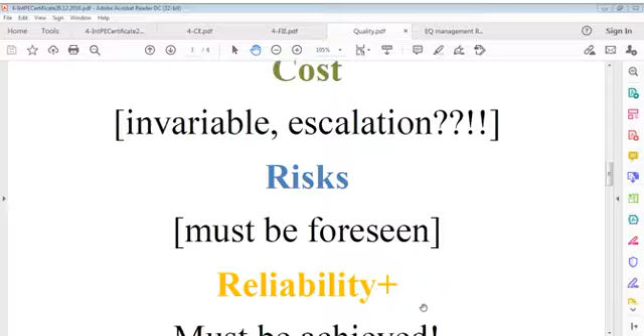I'm not saying only I am doing this, maybe I am wrong. There may be people working, but I have not seen such input on social forums, social websites, internet, or somewhere else. I don't know, maybe I am wrong. I'll be happy if I am proved wrong. I have written many times also on this issue, but I think people don't even like to read that.

I put my URL sometimes on my postings on social media, but I am not sure what happens.

Our profession, our jobs shall work only if people are alive, if the country is healthy. If the country is not healthy, people keep on dying, keep on suffering because of COVID-19 or such virus. What shall we do? I have no answer. Today the situation is very grim, very serious. Around 2 crore people are already infected officially, but I don't agree with that. Around 200,000 people have lost their lives, but it's more than that. I don't agree with government figures, but because these are official, we have to refer to them.

Reports are coming in from various reliable sources that the speed of COVID-19 spread is going to heavily increase in coming times. Some say in May it will be 500,000 infections per day. Some say it is up to 800,000 per day. It's a very grim figure. It is, yes.

Now it is about 20% positivity of cases of those tested every day. If we take that 20%, and we have a total population of 130 crores, 20% of that can be 26 crores, or 25 crores, or 250 millions. That point we should not forget, that we are standing in a very problematic state of COVID, and there is no solution so far.

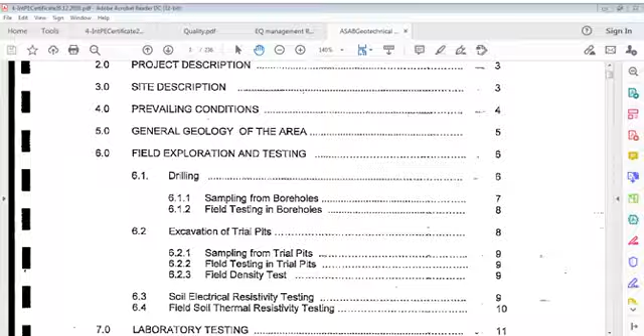And this has certain chapters, like what was the purpose of the study, what was the scope of work, project description, site description, prevailing conditions, general geology of the area, field exploration and testing. There is drilling, sampling from boreholes, field testing in boreholes, excavation of trial pits, sampling from trial pits, field testing in trial pits, field density test, soil electrical resistivity testing, and field soil thermal resistivity testing.

And then laboratory testing, that is laboratory tests and codes, then surface and subsurface conditions, ground materials physical, mechanical and thermal properties, materials chemical properties, sulfate content, chloride content, other chemical contents, oil and grease and hydrocarbons, pH value, and there could be groundwater in cavities.

General discussions for choice of suitable foundations, footings on sand, general consideration of settlement, consideration of bearing capacity, choice of types of foundations, then conclusion, which is foundation depth and type, tank foundations and hydrostatic testing, the available bearing pressure, foundation settlement, soil design parameters, foundation subject to vibrations, general consideration in designing dynamic bases, subgrade evaluation and pavement

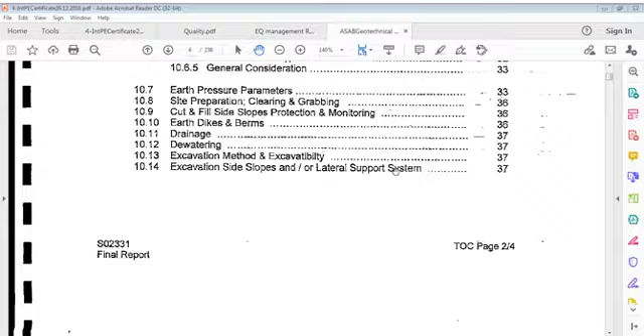consideration, objectives, method of analysis, subgrade properties, recommended type of pavement, general considerations, earth pressure parameters, site preparation, clearing and grubbing, cut and fill, side slopes, protection and monitoring, earth dikes and berms, drainage, dewatering, excavation methods, excavatability, excavation side slopes and lateral support system, and also backfill material and compaction criteria, structural fill and general fill. There are many other fills as well, but these two are important.

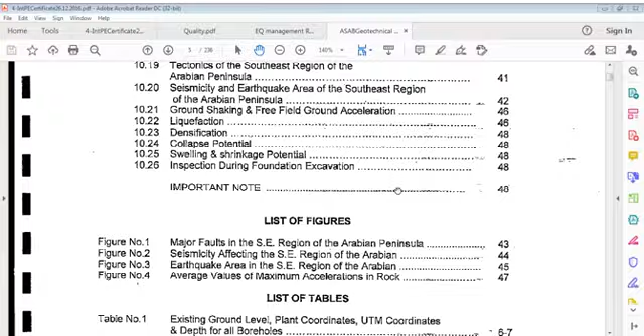And borrow sources, soil resistivity and corrosivity, foundation concrete, tectonics of southeast region of the Arabian Peninsula, seismicity and earthquake area of southeast region of Arabian Peninsula, ground shaking and free field ground acceleration, liquefaction, densification, collapse potential, swelling and shrinkage potential, inspection during foundation excavation.

And then there are certain figures, major faults in southeast region of Arabian Peninsula, seismicity affecting southeast region, earthquake area in southeast region, average values of maximum acceleration in rocks. Then there are certain tables which give existing ground levels, plant coordinates, UTM coordinates and depth for all boreholes and trial pits. Proposed foundation level, foundation type and allowable bearing pressure, representative compression wave and shear wave velocities, summary of CBR and modified Proctor, earth pressure and soil parameters, soil corrosivity versus resistivity.

And here is the appendix. Location of boreholes and trial pits, means where these are located, coordinates, and also logs of boring and trial pits, legend to logs, logs of boring, logs of trial pits, generalized subsurface profiles, and field test results, field density test results,

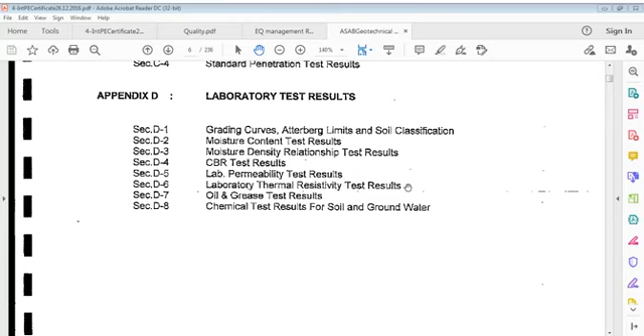soil electrical resistivity test results, soil thermal resistivity test results, standard penetration test results, laboratory test results, grading curves, Atterberg limits and soil classification, moisture content test results, moisture density relationship test results, CBR test results, laboratory permeability test results, laboratory thermal resistivity test results, oil and grease test results, chemical test results for soil and groundwater. This is the index of that.

You can see a huge coverage has been included in this soil report. You may not find all that in your soil engineering books. This is practical, a kind of thorough extraction of knowledge in this report. It's very important to read such reports for enhancing your knowledge, how work is done in field. This is much above what you study in your university, because university won't give you this much chance or opportunity to know something.

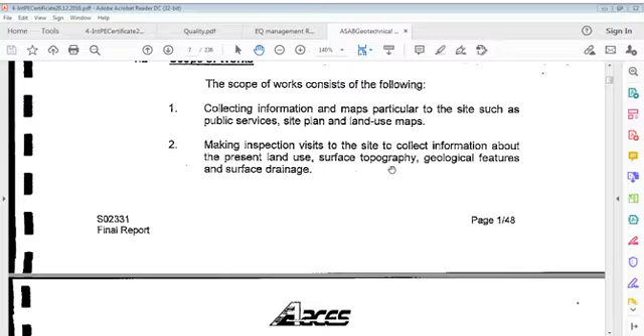Now, for example, it says in the scope of work here, why this report was prepared, what was the reason. The scope of works consists of the following: collecting information and maps particular to the site, such as public services, site plan, and land use maps. Making inspection visits to the site to collect information about present land use, surface topography, geological features, and surface drainage.

Drilling a total of 28 boreholes, or it is 28 in this case, there can be whatever number, and boreholes you know very well, in situ testing and sampling of disturbed and undisturbed samples. Excavation of 3 trial pits, can be whatever number depending on areas. Carrying out 14 field density tests, it can be whatever number of field density tests.

Carrying out 18 electrical resistivity tests with 0.75, 1.5 meter, 2.25 meter, 3 meter and 4.5 meter spacings, various spacing based electrical resistivity tests. Carrying out 6 field thermal resistivity tests.

Carrying out physical, mechanical, thermal and chemical laboratory testing as follows, which is very important. It's giving physical, mechanical, thermal and chemical laboratory testing. It's very important. Its range of tests, you can say soil samples, range of tests. This is particle size analysis.

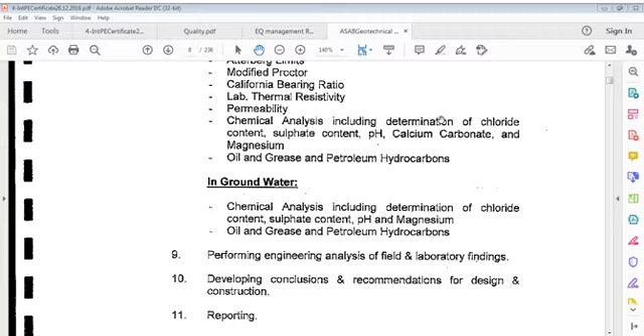Particle size analysis, materials passing number 200, moisture content, Atterberg limits, which you know, liquid limit, plastic index, all that. Modified Proctor density, California bearing ratio CBR, that is used for roads. Lab thermal resistivity, permeability, chemical analysis including determination of chloride content, sulfate content, pH, calcium carbonate, and magnesium. Oil and grease and petroleum hydrocarbons.

These are tests related to laboratory, and you may call them generally full range, though it's not complete full range. Yes, these are very important tests because particle size is very important. We have to do so much testing on that to know what size or fineness is, all that. Moisture content, Atterberg limits. All you have studied, that is just a kind of information that has been accumulated in one place.

Oil and grease and petroleum hydrocarbons, and in groundwater, chemical analysis including determination of chloride content, sulfate content, pH and magnesium, oil and grease and petroleum hydrocarbons, performing engineering analysis of field and laboratory findings, developing conclusions and recommendations for design and construction, and reporting.

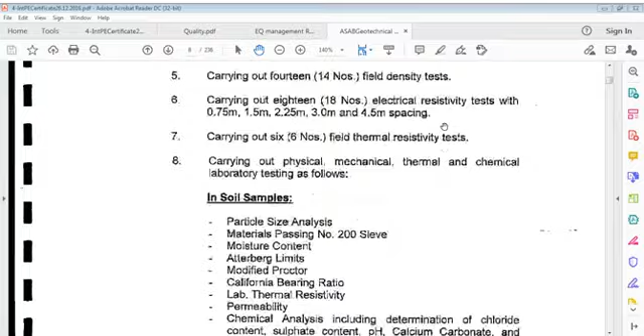So these 11 points are written here, which constitute the scope of this report. It's a specific one in this case, but there can be whatever size of scope, there's no limit. Because this was a big project, the scope is extensive. And the project has a description of sites. Just for your information, I read it for you. It has nothing to do with the report. It just tells you what this project is.

This project was planned at whatever site in 2000. The existing plant comprises certain identical trains, total 826 MSCs, having gas separation and condensate stabilization. The new processing facility shall include gas treating, molecular sieve dehydration, NGL recovery, acid gas compression.

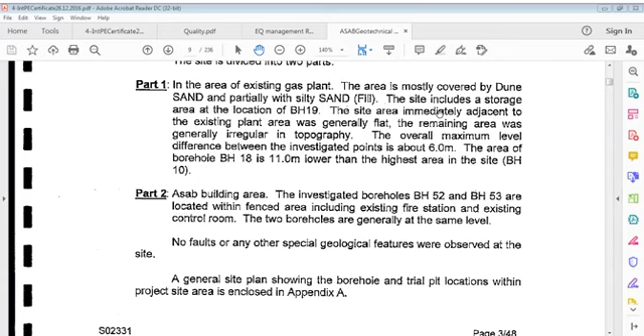Now the site is located in a remote area, and we are not worried about this, we are worried about the report. Still I read the weather conditions, maybe you are interested in writing some report about soil investigation, or you may see some report. Prevailing conditions must be shown somewhere, and the site is situated in Abu Dhabi where a hot arid climate prevails.

A hot arid climate is one where evaporation exceeds precipitation, such as rain and dewfall. This climate regime produces characteristic hot desert terrains. Average annual rainfall may only be a few centimeters, even only a few millimeters in some parts, which usually occurs seasonally and sometimes only from a single cloudburst.

Summer shade temperatures are frequently in excess of 40 degrees Celsius, and humidities may be around 100% near the coast. Contrast between maximum night and day temperatures, and between night and day humidities, is often great. Strong persistent winds are normal in many areas.

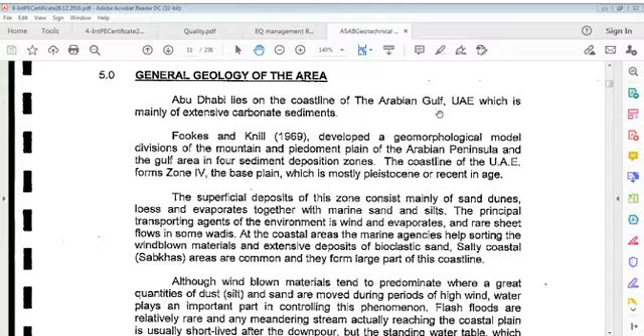Now, this geomorphological model division of mountain and piedmont plain of the Arabian Peninsula and Gulf area in four sediment deposition zones: the coastline of this country, that is zone 4, base plain, which is mostly Pleistocene or recent in age. Superficial deposits of this zone consist mainly of sand dunes, loess and evaporites together with marine sand and silts.

Principal transporting agents of the environment are wind and evaporites and rare sheet flow in some valleys. At coastal areas, marine agencies help sorting windblown materials and extensive deposits of bioclastic sand. Salty coastal areas, which we call in their language sabkhas, are common and they form a large part of this coastline.

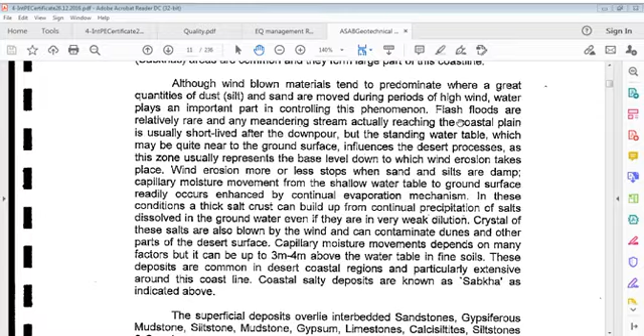Although wind-blown materials tend to predominate, where great quantities of dust, silt and sand are moved during periods of high wind, water plays an important part in controlling this phenomenon. Flash floods are relatively rare, and whatever meandering stream actually reaching the coastal plain is usually short-lived after a downpour. But the standing water table, which may be quite near to the ground surface, influences desert processes, as this zone usually represents the base level down to which wind erosion takes place.

Wind erosion more or less stops when sand and silts are damp. Capillary moisture movement from the shallow water table to the ground surface readily occurs, enhanced by continual evaporation. In these conditions, a thick salt crust can build up from continual precipitation of salts dissolved in groundwater, even if they are in very weak dilution. Crystals of these salts are also blown by wind and can contaminate dunes and other parts of the desert surface. Capillary moisture movement depends on many factors, but it can be up to 3 to 4 meters above the water table in fine soils.

These deposits are common in desert coastal regions and particularly extensive around this coastline. Coastal salty deposits are known as sabkhas, as indicated above. Superficial deposits overlie interbedded sandstones, gypsiferous mudstone, siltstone, mudstone, gypsum, limestones, calcisiltites, siltstones and conglomerates. Now, that was just a reference of what is below ground.

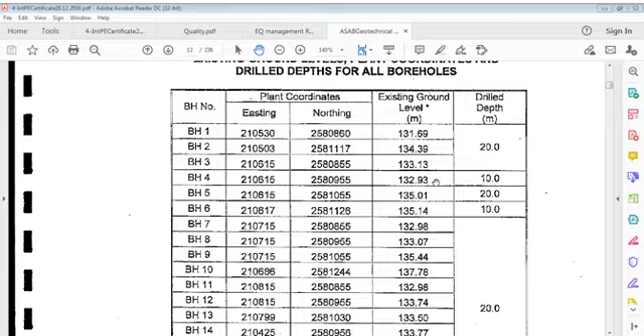Now, the drilling survey execution, investigation execution: in 2002, 28 boreholes were drilled at the project site. Boreholes are numbered BH1 through BH26, then BH52 and BH53. Existing ground levels, plan coordinates and drill depths at all boreholes are presented in this table. You can see this table has borehole number, plant coordinates, that's easting and northing, existing ground level and drill depth, from BH1 onwards.

Levels are referred to like 131.69, and of course drill depth is given as 20 meters, 10 meters, 20 meters, 10 meters, whatever they did, and levels are related to the department datum, so it's just reference. Existing ground levels, plan coordinates, etc., same continues. Borehole locations were determined by the company, and rotary drilling was executed.

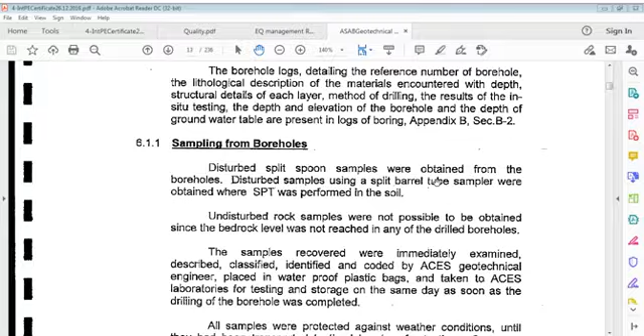Now, borehole logs detailing reference number of borehole, lithological description of materials encountered with depth, structural details of each layer, method of drilling, results of in situ testing, depth and elevation of borehole, and depth of groundwater table are presented in logs of boring. We'll see that one. Sampling from borehole. I'm just trying to say what they did in the beginning. I'm not going to read all. Just for information, we'll continue our engineering.

Disturbed split spoon samples, I'm talking of boreholes. Disturbed split spoon samples were obtained from boreholes. Disturbed samples using a split barrel tube sampler were obtained where SPT, standard penetration test, was performed in soil. Undisturbed rock samples were not possible to obtain since bedrock level was not reached in any of the drilled boreholes.

Samples recovered were immediately examined, described, classified, identified, and coded by the ACES geotechnical engineer, ACES being Arab Center Engineering, placed in waterproof plastic bags and taken to laboratories for testing and storage on the same day as soon as drilling of the borehole was completed. All samples were protected against weather conditions until they had been transported to the laboratory for testing. Care was taken during handling, packing, transporting and storing of samples to protect them against all moisture content alterations.

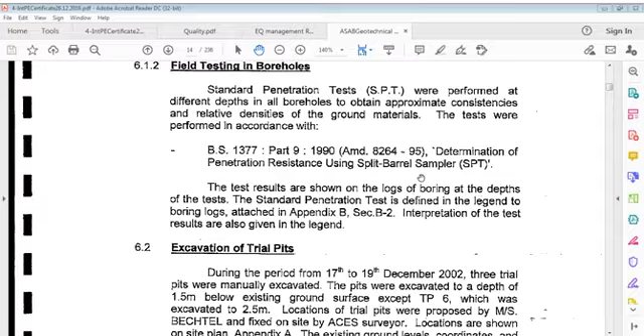Field testing in boreholes. Standard penetration tests, SPT we call it, were performed at different depths in all boreholes to obtain approximate consistencies and relative densities of ground materials. Tests were performed in accordance with BS 1377 Part 9 1990, Amendment 8264-95, determination of penetration resistance using split barrel sampler SPT. Test results are shown on logs of boring at depths of tests. The standard penetration test is defined in the legend to the boring logs attached in the appendix. Interpretation of test results is also given there.

Then trial pits. During the period, 3 trial pits were manually excavated. Pits were excavated to a depth of 1.5 meters below existing ground surface, except TP6, which was excavated to 2.5 meters. Locations of trial pits were proposed by the company. Locations are shown. Existing ground levels, coordinates and excavation depth for all trial pits are summarized. Now it's the trial pits table.

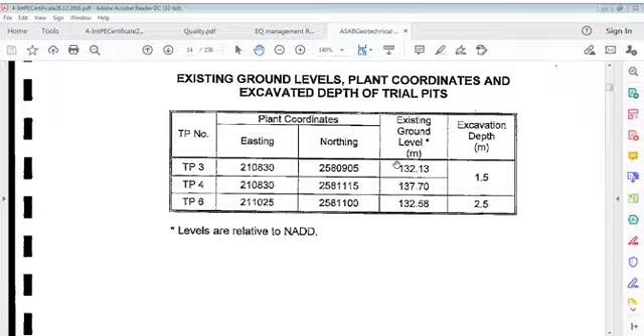Trial pits number, plant coordinates, easting, northing, existing ground level and excavation depth 1.5. 2.5. Sampling from trial pits. Representative bulk samples were obtained at every change of strata from each trial pit throughout excavated depths. These samples were placed in waterproof plastic bags, labeled and taken to laboratories for further examination and testing.

The following tests were performed on selected samples: natural moisture content, grain size analysis. What is natural moisture content? It is an important one. Grain size analysis, percentage fines passing sieve number 200, Atterberg limits, moisture density relationship modified, California bearing ratio CBR, thermal resistivity and chemical tests.

All laboratory test results are presented. Trial pit logs including plasticity index, in situ density, modified Proctor and CBR test results are presented. Field testing in trial pits. All sides and bottom of each pit were thoroughly examined and described by a geotechnical engineer according to ASTM 2488. Soil classification was adjusted according to ASTM 2487 after completion of laboratory testing.

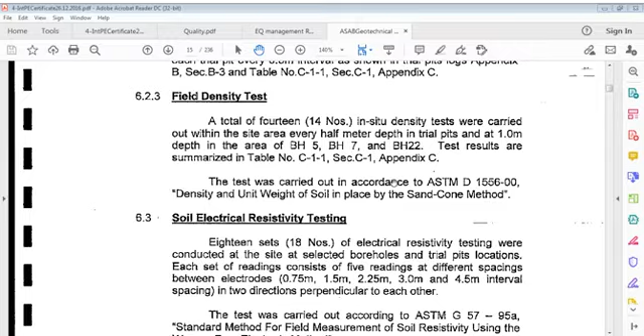In situ density test was performed in each trial pit every 0.5 meters, half a meter interval, as shown in trial pit logs. Field density test. 14 in situ density tests were carried out within the site area every half meter depth in trial pits and at 1 meter depth in the area of BH5, BH7 and BH22. Test results are summarized. Test was carried out in accordance with ASTM 1556-00, density and unit weight of soil in place by sand cone method.

Soil electrical resistivity testing. 18 sets of electrical resistivity testing were conducted at site at selected borehole and trial pit locations. Each set of readings consists of 5 observations. Each set of observations consists of 5 readings at different spacings between electrodes.

These are number 1, 0.75 meter, number 2, 1.5 meter, number 3, 2.25 meters, number 4, 3 meters and then 4.5 meters. Interval spacing in 2 directions perpendicular to each other. Test was carried out according to ASTM G57-95a standard method for field measurement of soil resistivity using Wenner 4 electrode method. Portable Megger DET5/4D digital earth tester was used. That is portable Megger. Test results are presented.

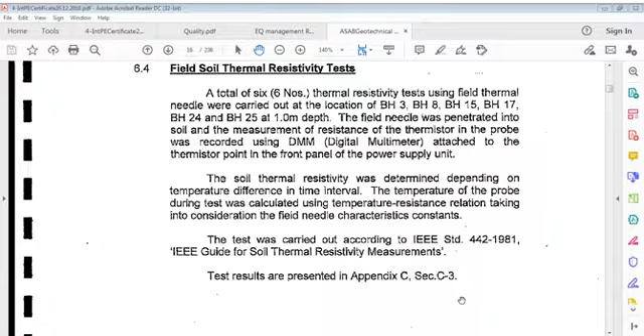Okay, now field soil thermal resistivity test. 6 thermal resistivity tests using field thermal needle, an important one, were carried out at locations of these boreholes at 1 meter depth. Field needle was penetrated into soil, and measurement of resistance of thermistor in probe was recorded using DMM, that is digital multimeter, attached to thermistor point in front panel of power supply unit.

Soil thermal resistivity was determined depending on temperature difference in time interval. Temperature of probe during test was calculated using temperature resistance relation, taking into consideration field needle characteristics constants. Test was carried out according to IEEE Standard 442-1981, Guide for Soil Thermal Resistivity Measurements.

Now, laboratory testing is very important on samples collected. In order to determine physical, mechanical, thermal and chemical properties of ground materials, laboratory tests were performed on selected samples from boreholes, trial pits and from existing surface. Laboratory test results are presented.

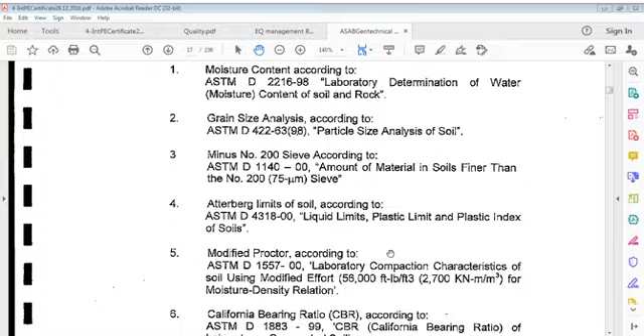Laboratory tests were moisture content, ASTM D2216-98, laboratory determination of water moisture content of soil and rock; grain size analysis according to ASTM D422-63(98), particle size analysis of soil; minus number 200 sieve according to ASTM D1140, amount of materials in soil finer than number 200, 75 micrometer sieve. Atterberg limits of soil according to ASTM D4318: liquid limit, plastic limit and plasticity index of soils.

Modified Proctor according to ASTM D1557, laboratory compaction characteristics of soil using modified effort, 2700 kilonewton meter per meter cube, for moisture density relation. Yes, the modified Proctor is according to this. California bearing ratio CBR according to ASTM D1883-99, CBR of laboratory compacted soil.

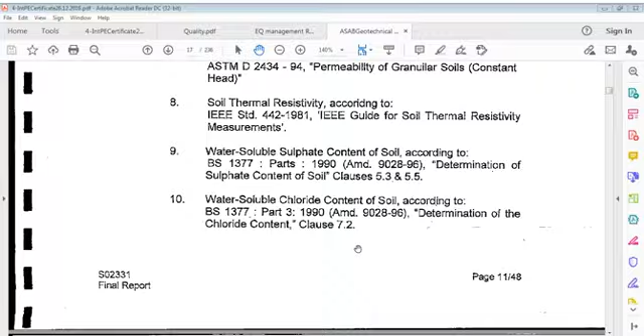Laboratory permeability according to ASTM D2434-94, permeability of granular soils, constant head. Soil thermal resistivity according to IEEE Standard 442-1981, IEEE guide for soil thermal resistivity measurements. Water soluble sulfate content of soil according to BS 1377 Part 3 1990, Amendment 9028, 1996, determination of sulfate content of soil,

clause 5.3. Water soluble chloride content of soil according to BS 1377 Part 3, 1990, Amendment 9028, 1996, determination of chloride content, Clause 7.2. Calcium carbonate content of soil according to BS 1377, Part 3, 1990, Amendment 9028, 1996, determination of carbonate content, Clause 6.3. Magnesium of soil according to ASTM D511, 1998, calcium and magnesium of soil.

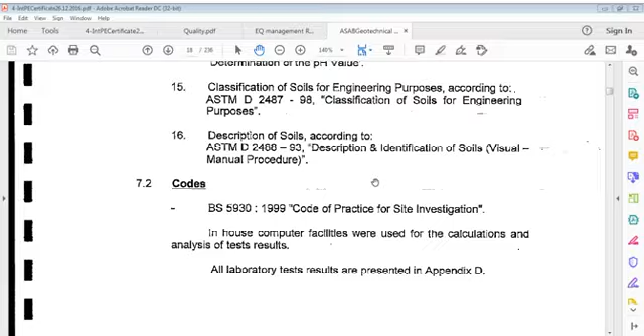Oil and grease and petroleum hydrocarbons in soil according to APHA 20th edition. pH value according to BS 1377 Part 3, 1990, amendment as above, test 9, determination of pH value. Classification of soils for engineering purposes according to ASTM D2487-98. Description of soils according to ASTM D2488-93, description and identification of soils, visual-manual procedure. Codes: BS 5930 1999, code of practice for site investigation.

In-house computer facilities were used for calculations and analysis of test results. All laboratory test results are presented in Appendix D. Now, surface and subsurface conditions. These are observations from these tests. Boreholes show that there are general similarities and continuities of subsurface materials encountered. However, some local variations were observed within the whole site area.

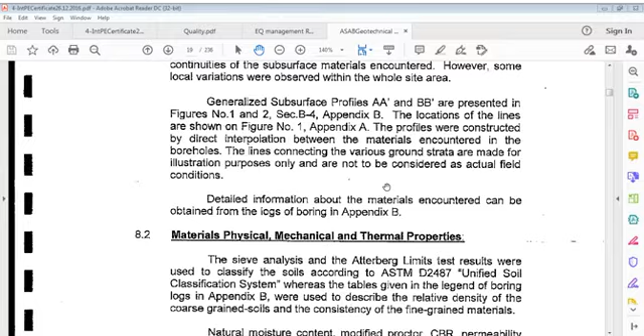Generalized subsurface profiles AA and BB are presented in figures 1 and 2. We'll see. Section B, Appendix B. Location of lines is shown on a different figure, in Appendix A. Profiles were constructed by direct interpolation between materials encountered in boreholes. Lines connecting various ground strata are made for illustration purposes only and not to be considered as actual field conditions. Detailed information about materials encountered can be obtained from logs of boring in Appendix B.

Materials, physical and mechanical properties. Sieve analysis and Atterberg limits test results were used to classify soils according to ASTM D2487 Unified Soil Classification System. Various tables given in the legend of boring logs in Appendix B were used to describe relative density of coarse-grained soils and consistency of fine-grained materials. Natural moisture content, modified Proctor, CBR, permeability and thermal resistivity were also carried out on selected samples from site. Further information about materials and their physical and mechanical properties can be obtained from the Appendix.

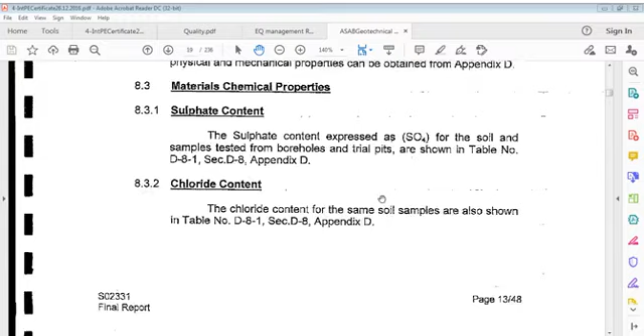Materials chemical properties, sulfate content. Sulfate content expressed as SO4 for soil samples tested from boreholes and trial pits is shown in table D8.1. Chloride content for the same soil samples is also shown in this table. Other chemical contents in soil like calcium carbonate content and magnesium were determined and tests are given. Oil and grease and hydrocarbons in soil for the same samples were determined. Test results are summarized and given.

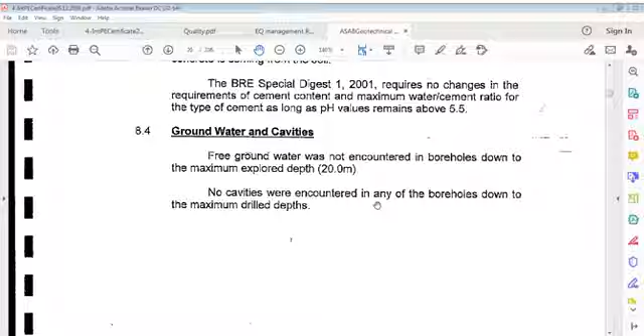pH value. Measured pH values for tested soil samples are above 7, which indicates that soil samples are slightly alkaline. Therefore, no acid attack on concrete from soil is possible. Concrete may be free from acid attacks. BRE Special Digest 1 2001 requires no changes in requirements of cement content and maximum water cement ratio for type of cement as long as pH value remains above 5.5. So there is no problem in requirement of cement content and maximum water cement ratio.

Groundwater and cavities. Free groundwater was not encountered in boreholes down to maximum explored depth of 20 meters. So this is water-free substrata. No cavities were encountered in any of the boreholes down to maximum drill depths. General discussion for choice of suitable foundation. This is also very important from an engineering viewpoint. We have to understand this because this is a practical recommendation by soil engineers.

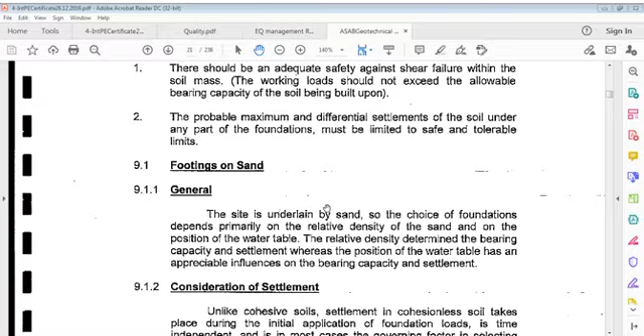Now, in designing foundations, the engineer must satisfy two independent stability requirements which must be met simultaneously. There should be an adequate safety against shear failure within the soil mass. Working load should not exceed allowable bearing capacity of soil being built upon. So this is safety against shear failure. Probable maximum and differential settlements of soil under whatever part of foundations must be limited to safe and tolerable limits.

So there are two points. One is for shear and the other for differential settlement. There should be an adequate safety against shear failure, working loads should not exceed allowable bearing capacity of soil, and probable maximum and differential settlements of soil under whatever part of foundations must be limited to safe and tolerable limits.

Now, footings on sand. The site is underlain by sand, so choice of foundation depends primarily on relative density of sand and position of water table. Relative density determines bearing capacity and settlement, whereas position of water table has an appreciable influence on bearing capacity and settlement. Consideration now, what we do for settlement.

Unlike cohesive soils—cohesive meaning clay soil—settlement in cohesionless, or non-cohesive, soils takes place during initial application of foundation loads. It is time independent.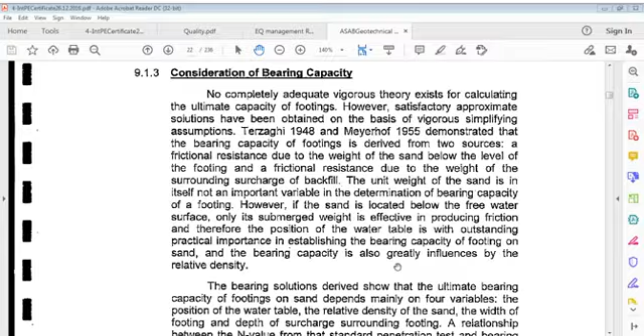Bearing capacity: no completely adequate rigorous theory exists for calculating ultimate capacity of footings. However, satisfactory approximate solutions have been obtained on the basis of rigorous simplifying assumptions. Terzaghi in 1948 and Meyerhof in 1955 demonstrated that bearing capacity of footings is derived from two sources: frictional resistance due to the weight of sand below the level of footing, and frictional resistance due to the weight of the surrounding surcharge or backfill.

Unit weight of sand is in itself not an important variable in determining bearing capacity of a footing. However, if sand is located below the free water surface, only its submerged weight is effective in producing friction, and therefore the position of the water table is of outstanding practical importance in establishing bearing capacity of a footing on sand. Bearing capacity is also greatly influenced by relative density.

Bearing solutions derived show that ultimate bearing capacity of footings on sand depends mainly on four variables: position of the water table, relative density of sand, width of footing, and depth of surcharge surrounding the footing. A relationship between the N value from the Standard Penetration Test and bearing capacity was established; however, this relationship is approximate.

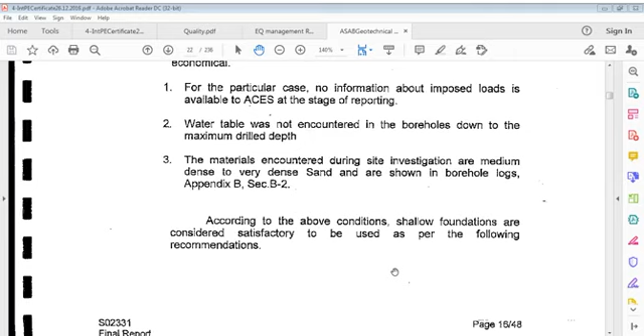For this particular case, no information about imposed load is available, so leave it. Water table was not encountered, so leave it. Materials encountered during site investigation are medium dense to very dense sand, and these are shown in the borehole logs. According to this condition, shallow foundations are considered satisfactory to use, following the recommendations.

What are these recommendations? According to field and laboratory investigations, subsurface conditions, engineering analysis, and practical experience, it can be concluded that the proposed structures and facilities can be satisfactorily supported by the ground at the site, provided that the following recommendations are taken into consideration: foundation depth and type.

Shallow foundations—you can say isolated footings connected with tie beams, and/or strip footings or raft foundations—can be laid at different depths. Materials encountered at those depths are medium dense to very dense sand with silt materials, either sand or sand with silt, which is considered suitable to provide adequate support for the proposed structures and facilities.

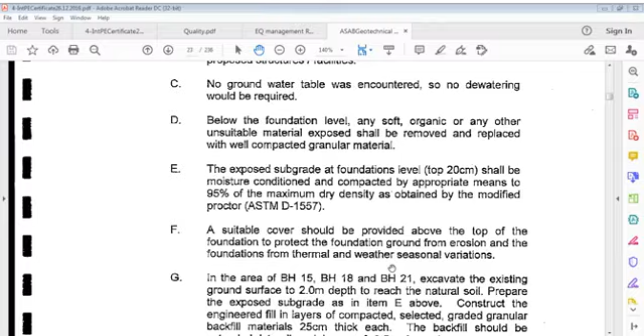No groundwater table was encountered, so no dewatering would be required. Below foundation level, whatever soft, organic, or otherwise unsuitable material is exposed shall be removed and replaced with well compacted granular material. So there is a direct indication in certain cases for soil improvement.

The exposed subgrade at foundation level—top 20 cm—shall be moisture conditioned and compacted by appropriate means to 95% maximum dry density as obtained by modified Proctor, ASTM D1557. A suitable cover should be provided above the top of the foundation to protect the foundation ground from erosion and the foundations from thermal and weather seasonal variations.

Now, in areas of boreholes 15, 18, and 21, excavate the existing ground surface to 2 meters depth to reach natural soil. Prepare the exposed subgrade as in the item above. Construct engineered fill—this is important.

Construct engineered fill in layers of compacted, selected, graded granular backfill materials, 25 cm thick each. Backfill should be extended laterally a minimum of 0.5 meter from the edges of foundations. Backfill should be compacted to 95% of maximum dry density as obtained by modified Proctor. Engineered fill shall reach the foundation depth shown.

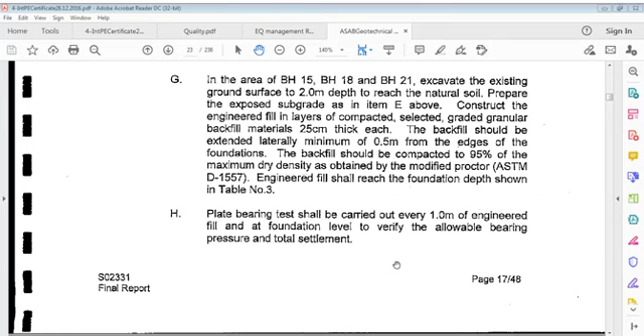So 95%, or even 98%, can be used. Now, plate bearing tests shall be carried out every 1 meter of engineered fill and at foundation level, to verify allowable bearing pressure and total settlement. Tank foundations and hydrostatic testing.

In general, a tank can be supported by either a reinforced concrete raft foundation or by a reinforced concrete ring beam.

Foundation depth may vary on natural subgrades, or the tank can be placed on selected and engineered fill materials at 0.5 meter higher than surrounding ground level. Final foundation depth shall be decided by the designer according to operational requirements.

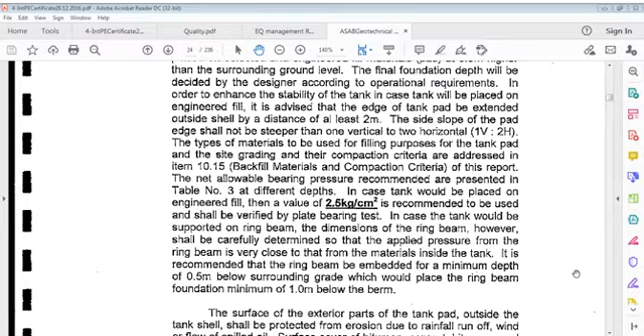Types of materials to be used for filling purposes for the tank pad and site grading, and their compaction criteria, are addressed in the item on backfill materials and compaction criteria.

Net allowable bearing pressure recommended is presented in table number 3. In case the tank would be placed on engineered fill, a value of 2.5 kg per centimeter square is recommended to be used and shall be verified by plate bearing test.

In case the tank would be supported on a ring beam, the dimensions of the ring beam shall be carefully determined so that the applied pressure from the ring beam is very close to that from materials inside the tank.

It is recommended that the ring beam be embedded for a minimum depth of 0.5 meter below surrounding grade, which would place the ring beam foundation a minimum of 1 meter below the berm.

Surface of exterior parts of the tank pad outside the tank shall be protected from erosion due to rainfall, runoff, wind, or flow of spilled oil. Surface cover of bitumen, cement, bitumen sand, or gatch, or locally available silty sand material, may be considered for this purpose.

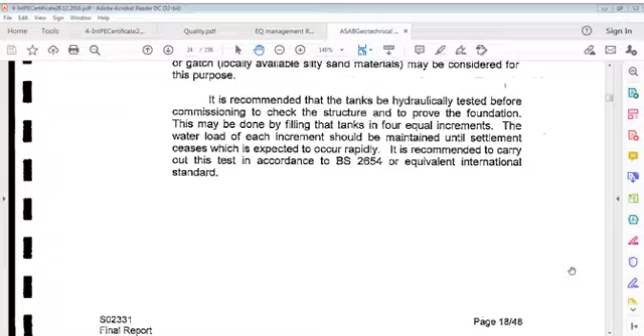It's recommended that tanks be hydraulically tested before commissioning to check the structure and prove the foundation. This may be done by filling the tank in 4 equal increments. Water load of each increment should be maintained until settlement ceases, which is expected to occur rapidly. It is recommended to carry out this test in accordance with BS 2654 or an equivalent international standard.

Allowable bearing pressure for shallow foundations was determined for the foundation ground as specified above, using practical experience and results obtained from field standard penetration tests and empirical equations developed by Terzaghi and Peck, as modified by Bowles, taking into consideration a safety factor of 3 against shear failure of soil.

Accordingly, net allowable bearing pressure values are recommended to be used for design of footings with different widths and at different depths, based on 25 mm settlement.

Foundation settlement was checked using recommended allowable bearing pressure values and values obtained from standard penetration tests, and found to be less than tolerable limits of 25 mm for isolated strip footings and less than 50 mm for raft foundations. Most of the settlement will take place during the construction period.

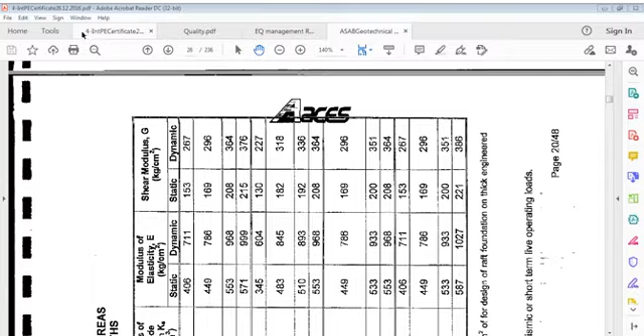We will take details later. My purpose was just to apprise everybody about how quality is maintained everywhere, and we have to think of, as I said about the soil report, I tried to refer you to this subject. It's really very important to understand this.

Soil report: the soil report requires a thorough review through the engineering section to be made sure that recommendations included by the soil or geotech engineer have been covered within the design report. In case of any pinpointed observation, it should be brought to the notice of the designer through agreed procedures.

Now, testing of all materials according to specification requirements must be conducted to ensure demanded quality adherence of materials. Particularly, reinforcing bars is an important item for the purpose of procurement, rightly.

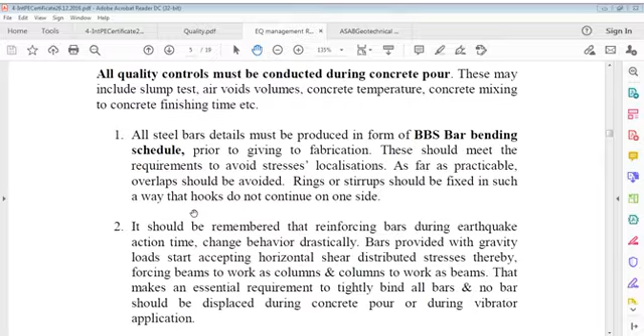All quality control must be conducted during the concrete pour. Whatever quality activities are required, the site engineer must make sure that whatever the drawings contain, whatever details are therein—ductile detailing of reinforcement—whatever details are missing should be read, understood, and pointed out. If you have some reservation, it must be discussed.

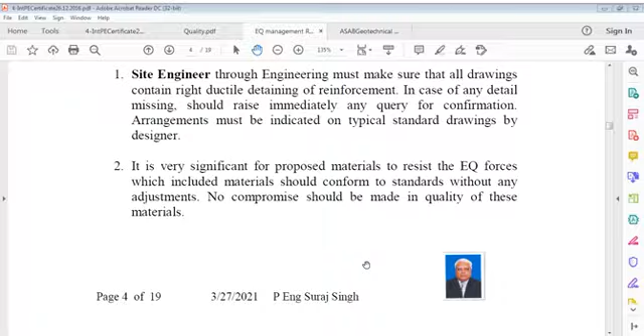It is significant for proposed materials to resist forces—materials should meet standards without any adjustments. No compromise. Generally it is RCC that is often used in various buildings and certainly considered for designs. It's significant to produce concrete works with good quality, and no batch of concrete should be allowed to be poured unsupervised.

The site engineer must ensure that whatever precautions are required on site should have been explained to all responsible skilled workers, craftspeople, as well as foremen or front leaders. All requirements should be included in the relevant method statements clearly, in each and every term, and all detailed method statements should be approved ahead of every activity.

All quality controls must be conducted during the concrete pour. These may include site tests such as slump, air voids, and temperature, and tracking concrete mixing to concrete finishing time—when the mixing starts and when the finishing of that concrete occurs. Whatever number of hours are admissible must be maintained.

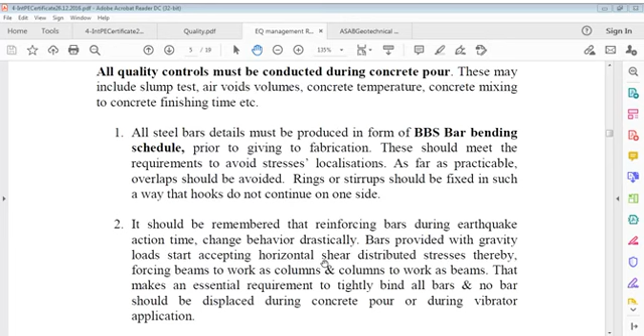The bar bending schedule is a very important item, which must be worked out correctly according to the formula given per code—whether BS 4466, BS 8666, or whatever code you are following, which should meet requirements. We have to apply all practical requirements to that BBS. You know the details, I'm not here to tell you details—you know everything.

We have to remember that reinforcing bars change their behavior during earthquake action—members change their behavior, and when members change behavior, the bars of course change behavior too. Columns and beams interchange because generally we talk of vertical gravity loads, but when we talk of seismic actions, part of that load converts to horizontal seismic shear, which applies horizontally. This certainly changes the behavior of these members temporarily—a percentage of behavior, not total behavior.

So binding of bars, tight binding of bars, displacement of bars are question marks here. No bar should move from position. And vibrators should not be allowed, as you know, to touch any rebar any time or shuttering any time, formwork any time. Overvibration is prohibited.

No overvibration should be allowed, which is not accepted. No pulling or pushing of concrete is accepted. Segregation is not accepted, and you know what segregation is. When fine aggregate and coarse aggregates are separated from the mix, that's called segregation, which is not acceptable, and it can happen due to more than required drop of concrete or overvibration.

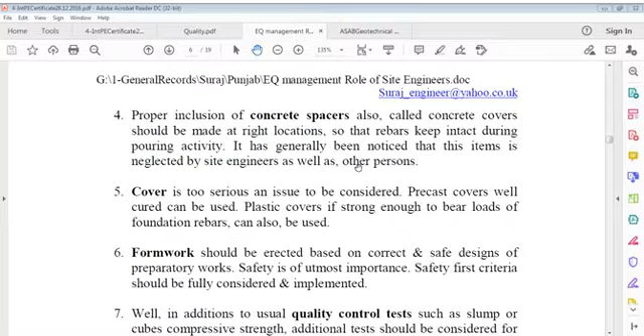Cover is too serious a matter, to be considered. Precast covers, well cured, can be used. Plastic covers, if strong enough to resist the force of steel and working, if they can bear loads of foundation rebars, can also be used. Formwork should be erected based on correct and safe designs of preparatory works. Safety is of utmost importance. Safety first criteria should be fully considered and implemented.

Safety in formwork is a very important issue, and there are two types of problems. One problem exists for suspended slab formwork that can open during casting, which is a big problem, which can cause accidents, loss of material and loss of lives, fatal injuries. And also when you cast columns or other vertical structures, due to concrete pressure, sides are prone to open. Due to horizontal pressure, when filled up, concrete pressure sometimes can open sides if it strikes the shutters, form surfaces. We have to be very considerate to take into consideration all these points.

Accidents can be caused by opening of sides, and that's very dangerous, particularly in case of slabs and also walls at height. So quality control tests such as slump, cube compressive strength, and additional tests such as core tests should be considered. Of course, curing is very important. Curing is responsible for the life and durability of concrete, and therefore must be given due care, controlled under direct command of responsible, experienced staff. No leniency or worry about cost of water, curing compound, Hessian or polythene sheet has to be accommodated.

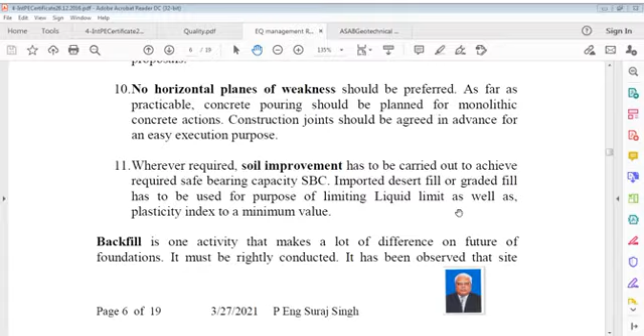I have already discussed soil improvement, which is a must, to get the required safe bearing capacity. Weak soil is removed and replaced by engineered fill or whatever method. Imported desert fill or graded fill can be used for the purpose of limiting liquid limit as well as plasticity index. Backfill is one activity that makes a lot of difference to the future of foundations; it must be rightly conducted. Site engineers try to neglect this supervision and save project time by filling thicker layers. It's not acceptable.

Backfills should comply with agreed specifications to achieve 95 to 98% field density. General fill can be compacted to 90% field density. Construction sequence should be correctly followed during scheduling. Foundations should be planned as far as possible to be cast monolithic. As general guidance, columns should be cast first. Beams and slabs should be cast monolithic in one time. All connections should be done to meet requirements.

It is to be ensured that proper bands are used in brick or stone buildings as required for horizontal resistance. Long walls should be inserted with bonding columns and bonding beams per specification. Infill walls should be taken up later after completing the framework. Connections between columns and walls should be made with proper fastenings. All construction activities must comply with designs and specification requirements. No negligence should be allowed. QA engineers have to be involved to check and inspect all activities by observation in addition to signing ITPs.

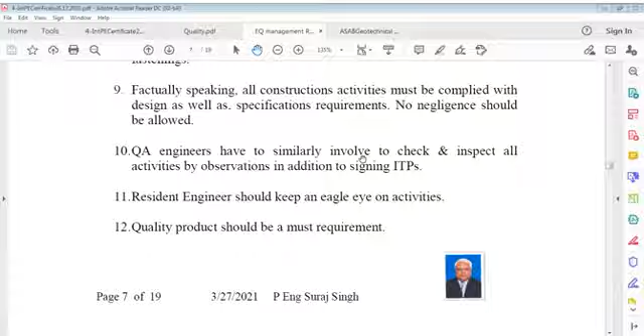Now, it says during earthquake action, every service system can break due to horizontal forces, which require strong and durable fills around with durable joints. All elements of buildings as well as finishing should be well secured and durable so that during earthquake impact these are not dissociated or torn out.

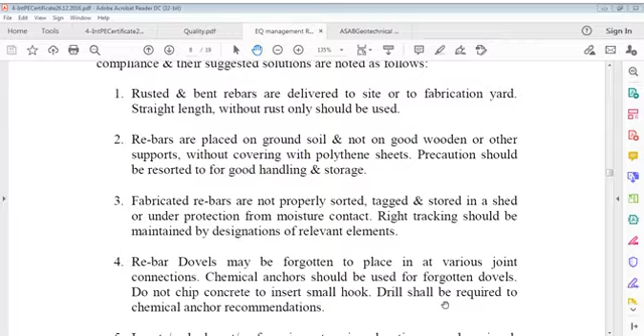We say rebars are placed on ground soil and not on good wooden or other supports. Without covering, without polythene sheets, these are left. Precautions should be resorted to for good handling and storage. Even fabricated rebars are not properly sorted out, tagged and stored in a shed or under protection from moisture contact. Right tracking should be maintained by designations of relevant elements.

Rebar dowels may be forgotten to place in various joint connections. Chemical anchors should be used for forgotten dowels. Do not chip concrete to insert a small hook. Drills shall be as required by chemical anchor recommendations.

Insert embedments of services at various locations may be missed. Approved shop drawings should be used for checking insert locations; coordinate insert locations to structural details. Blockouts for various services may be missed. Approved shop drawings should be used to overcome such problems. Coordinate these locations to structural details.

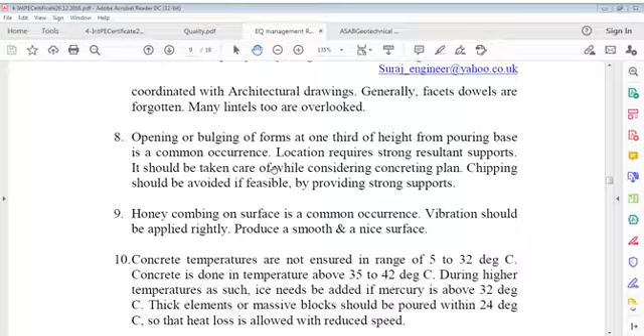Honeycombing on surface. Honeycombing on surface is a common occurrence, a common problem. Vibration should be applied rightly according to requirement, and only an experienced or trained person should be allowed to operate the vibrator on site. Produce a smooth and nice surface; that's the honeycombing remedy. Do good, a specific solution to the problem.

No? Now, honeycombing on surface is a common occurrence. We know vibration should be applied rightly to produce a smooth and nice surface.

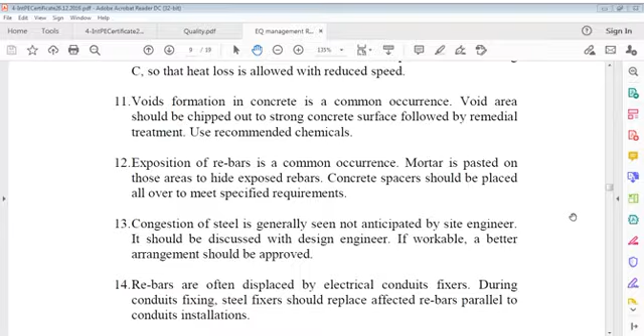Exposure of rebars is a common occurrence also. Mortar is pasted on those areas to hide exposed rebars. This is wrong. Concrete spacers should be placed all over to meet specified requirements. There is no way that rebar should be seen, no way. It can't be accepted. Some people don't understand even this much. That rebar should be behind cover.

Rebar should be behind cover. This point must be very clearly understood. We can't run away from this fact. Congestion of steel reinforcement is generally seen, not anticipated by the site engineer. It should be discussed with the design engineer, and if it's workable and acceptable, a better arrangement should be approved.

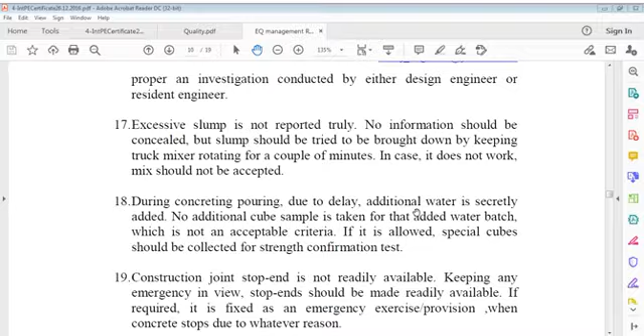Excessive slump is not reported truly. No information should be concealed, but slump should be brought down by keeping the truck mixer rotating for a couple of minutes. And in case it does not work, the mix should not be accepted.

During concreting pour, due to delay, additional water is secretly added. People do it. It's not permissible, but they do it. No additional cube sample is taken for that added water batch, which is not acceptable.

If it is allowed, you have to take cubes specifically for that portion. Make sure that the strength is not affected. Though it's not allowed, it should not be allowed. It's a crime-like situation.

It is concrete. It's not, I can say, a football match. It's not a cricket match, it's a life match. You are doing something for whole life for someone. Maybe it's not for you, but for the one who's going to stay in that, it's a question of life. We have to respect it that way.

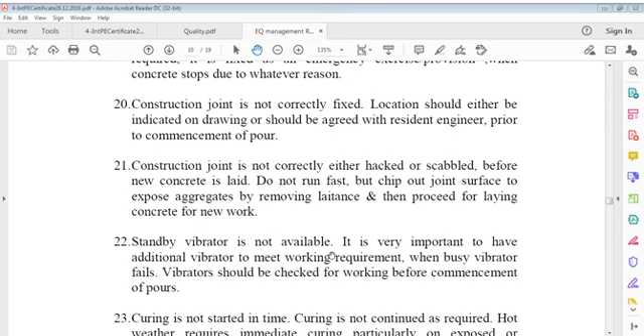Location should either be indicated on the drawing or be agreed with the engineer prior to commencement of the pour. Both should sit and decide about that. Construction joints not correctly hacked or scabbled before doing the next concrete. Do not run fast. Construction engineering is not fast in every activity.

Scabble or chip out the joint surface to expose aggregates and remove all laitance, and then proceed with cleaning and laying new concrete according to the agreed procedure. And also, you have to keep a standby vibrator ready. If it's not available, it's your fault; you have to keep it.

It's very important to have an additional standby vibrator to meet working requirements when the working vibrator fails. The vibrator should be checked for working before commencement of pours. And the person who operates it must be well trained before operating it in concrete, not only in its use but also its maintenance: how it should be cleaned after use, and how it should be tested before use.

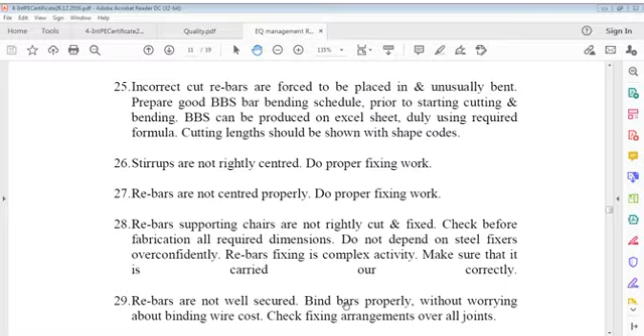Prepare a good bar bending schedule, as I said before, prior to starting cutting and bending or fabrication of bars. Excel sheet is good for this. You can formulate and formalize it yourself; no need for any software. You can use your own formula for whatever shape. Hardly there are 20-30 shapes, not more than that, practically speaking. So every engineer knows Excel software, and you can formalize the cutting length yourself. Once you have the cutting length, you can find members and everything, and go on with that.

Stirrups which take shear are not rightly centered. Do proper fixing and centering. Reinforcing bars are not centered properly. Do proper fixing work.

For rebars which rest on chairs - there are so many rebars, particularly in upper layers, heavy or light both, that rest on what we call chairs - they are not rightly cut and fixed. You have to check all required dimensions before fabrication. Do not depend on steel fixers or be overconfident. Rebar fixing is a complex activity; make sure it is carried out correctly. You must have a conception of how to assemble these bars. Cutting is one part, cutting and bending. Assembly is another part. Both are different but for the same activity - one stage is cutting and bending, another stage is assembly on site.

Reinforcing bars are not well secured. Bind bars properly without worrying about the binding wire cost. Check fixing arrangements over all joints. Tie bolts are not tightened properly. Use correct dimension tie bolts and fix properly as required.

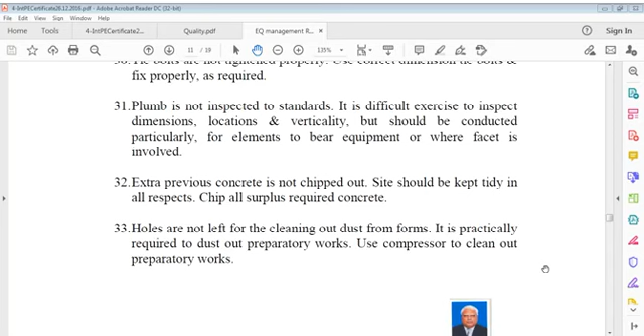Extra previous concrete is not chipped out. The site should be kept tidy. In every respect, chip all surplus required concrete.

Holes are not left for cleaning out dust from the forms. It's practically required to dust out during preparatory works. Use a compressor to clean out during preparatory works.

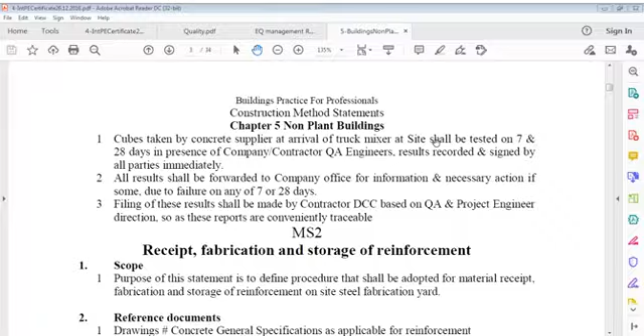All given - various method statements in certain files, for example blinding concrete. This is about how to receive, how to fabricate, and how to store reinforcement. What about block works above grade level?

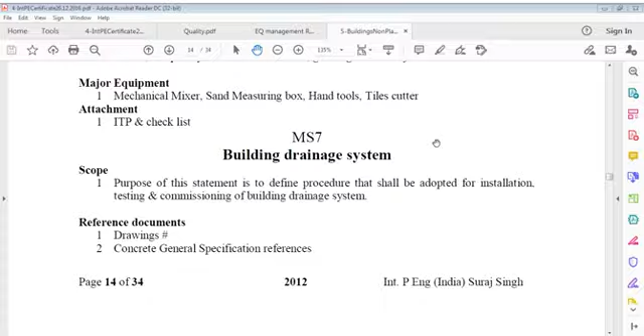About plastering and rendering block walls and RCC surfaces. About the roofing system, we generally call it the inverted system. About laying ceramic tiles, ceramic floor tiles. Building drainage system in general, not very specific. About floor screeds. Concrete produced interlocking blocks - how to lay them, what is the purpose, how. About some roadworks on driveways.

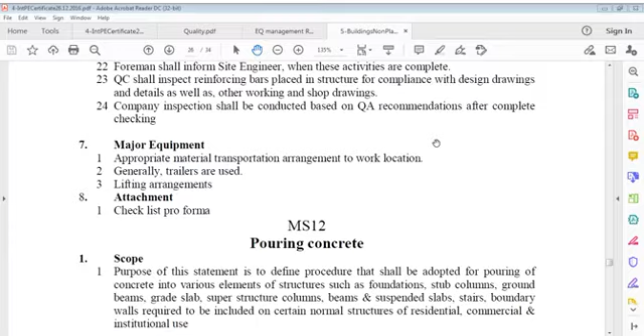Certain preparatory works pertaining to reinforcement placement. Pouring concrete. About post-concrete repairs. Sewerage pipeline laying work from a manhole located in the premises to existing lines - this is a particular application at some site. And then you can say there are also some more documents that are required to be shared with you, in various capacities.

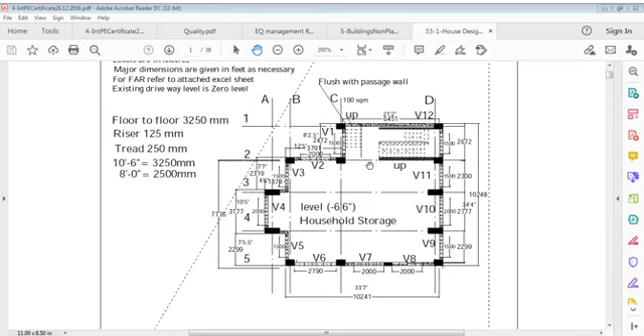This is total plan of that house. This is here, and this is here, as I said. Then...

The specialty is that this portion is double floor, double height. This is second floor for study room. This is terrace, above terrace, top terrace, you can say.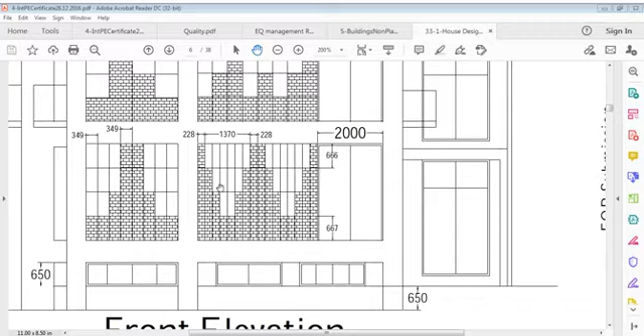You can see approximately the percentage - out of 16 squares, it works out to 7 in this case, and here it is 4 to 6 and 9, so a 7:9 ratio, you can say. These are 7 squares, 7:4, 4 to 6, 6 and 3, 9 - 7 covered and 9 open.

You can see that? These rectangles are open - counting 1 through 9 - and 7 is covered. So you can say 7:9 ratio, 7 covered wall and 9 is ventilation. So it's more than 50%, more than the minimum required for illumination.

Illumination area, window area - if you see here, counting through the squares, these are for ventilation, and here it works out to 50% as well. See the difference here.

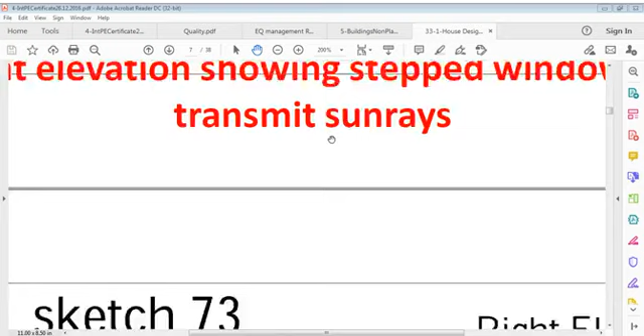This is front elevation showing stepped windows to transmit sun rays into covered area.

You can see also a similar follow-up in the right elevation, showing stepped window for sun rays. You can see that, as I said.

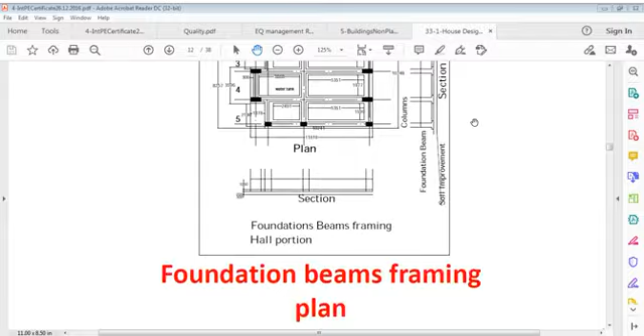This is framing now - foundation, basement floor slab, foundation beam frame plan. This is foundation, basement floors, foundation plan. This is your basement structural framing for ground floor.

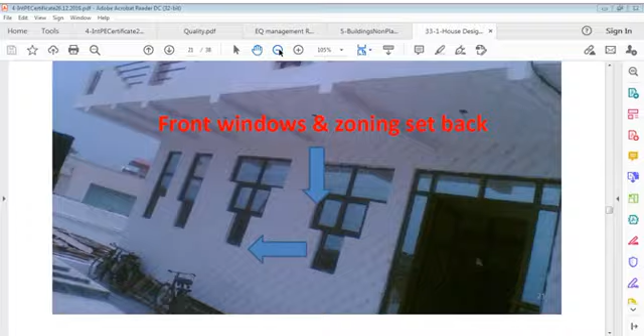These architectural decorations, etc. This is a location nameplate. Right side windows and driveway, front windows and zoning setback.

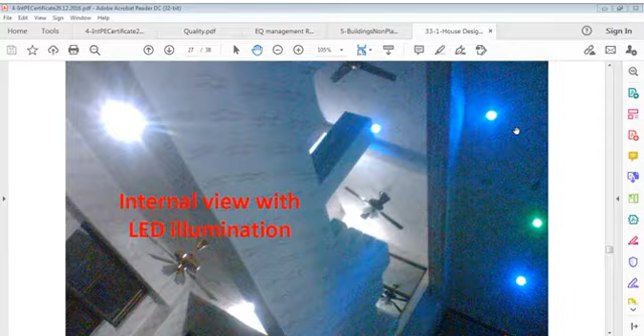You can see how these stepped windows look. This is a stair starting from here. I'll show you the basement also.

There's no column here, you can see it's connected, it's hung. This landing is hung, this beam, this hanging landing. And this is the basement portion of the stair. Let's see, steps started here.

Oh, this is our entry lounge, internal balcony.

Well, I can say, some field sketches I can say here. I'd also like to show you something.

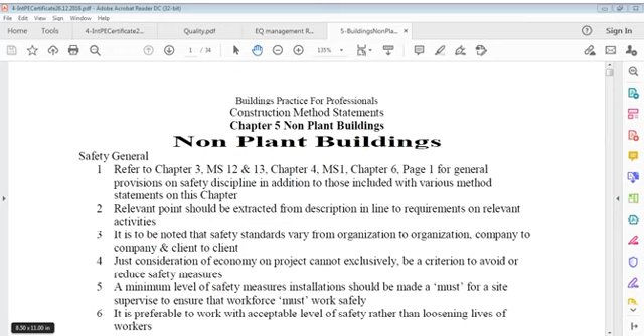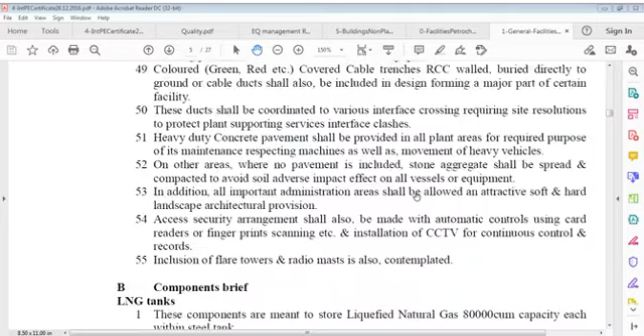I just tried to show you what I'm going to discuss in these chapters. Something is old, something is new. It's like that, you know.

Both are, you know, I can close it now because it may cause congestion. Also let me close this roll, its setting is also closed. So now at least I can try to give you something that can be started immediately, that must be taken care of immediately without wasting time.

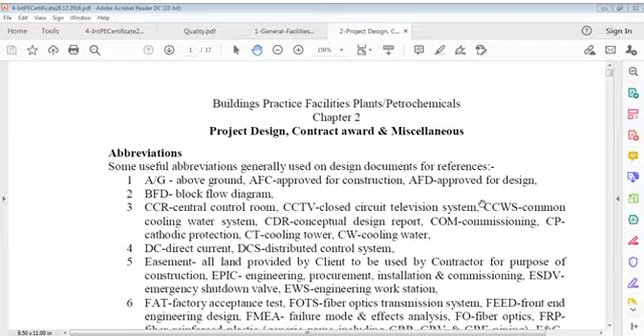This is another one, this is how we do that. You can see we have to talk of all this in the next times. Coming gradually, I'll take up this issue and I'll take up that one. We'll see how it works.

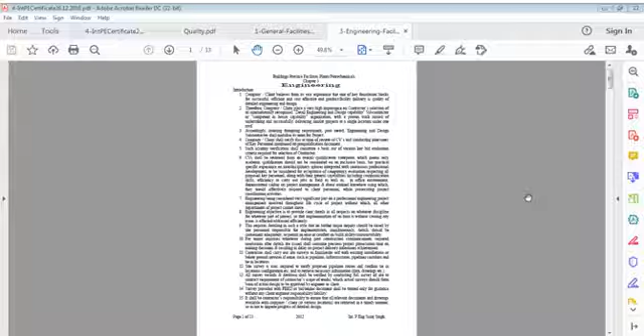This is a popular one, so you can say it's also engineering experience.

Let's print this off as well. I think I'll show you one by one, not all now. I must have sketches with me. Sketches, for example, these are columns, forms. So okay, it's there, we'll see them too.

So we can say we are going to, okay now you can say let's process. I think now we have to move forward. The purpose of this talk was general, and it happened. We are moving from one direction to the other direction.

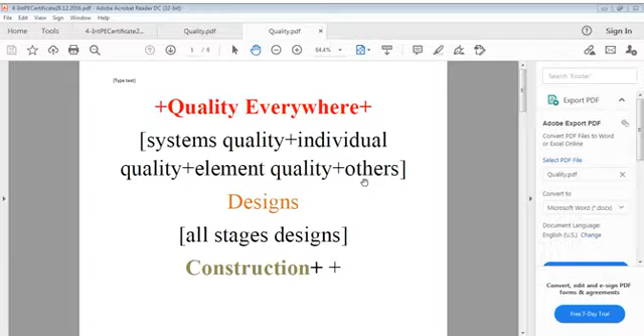So this is what, some changes to that one. Now quality everywhere, we'll talk designs, construction plus plus, you can say quality everywhere plus plus, all times. This element quality plus others, construction plus plus, performance, time, cost, risks, reliability, analysis, synthesis, thinking, and the only way must be contemplation and achieved engineering plus plus.

So we can say this is addition to the previous one, and we must be clear about this. I repeat, I can say, let's see, we're done.

And so this way: systems quality plus individual, let us say this way, quality everywhere, systems quality, individual quality, elements quality and others, designs, all stages designs, construction plus plus, construction plus plus, all activities, you can say all activities, other statements, express details, formation, constant, unchangeable.

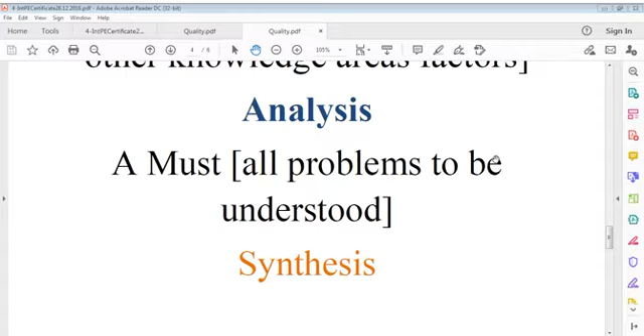Cost, invariable escalation, risks must be foreseen, reliability plus must be achieved: reliability, safety, serviceability and durability, other knowledge areas, factors, analysis, a must, all problems to be understood, synthesis, all solutions network must reach compatibility, thinking and only way, contemplation and must be achieved, applications must be effective, and engineering, this is, you may say.